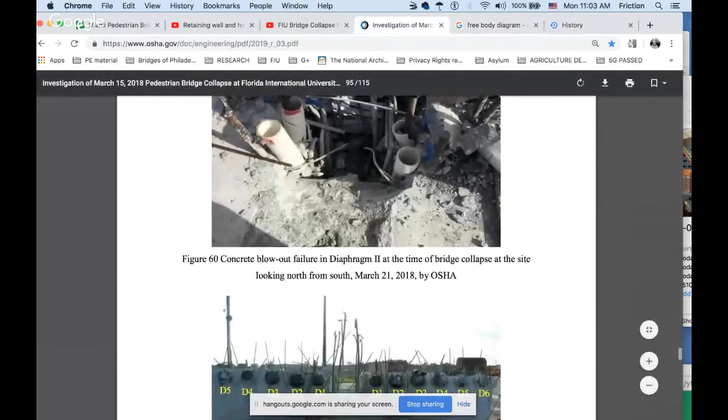If we come to the OSHA report, we find that the software was used by Louis Berger and Adina to analyze the structure in accord with the FDOT requirements that the reviewer use software. So FDOT requires the reviewer to use software other than the one used by the designer. This is reported as a requirement to use different software. So that's not technically an issue, is it? Because you were told to use different software by FDOT.

FDOT had used software, FIGG had used software, Larsa 4D and Lusas, whatever. So you have three different softwares being run here to come up with an analysis, right?

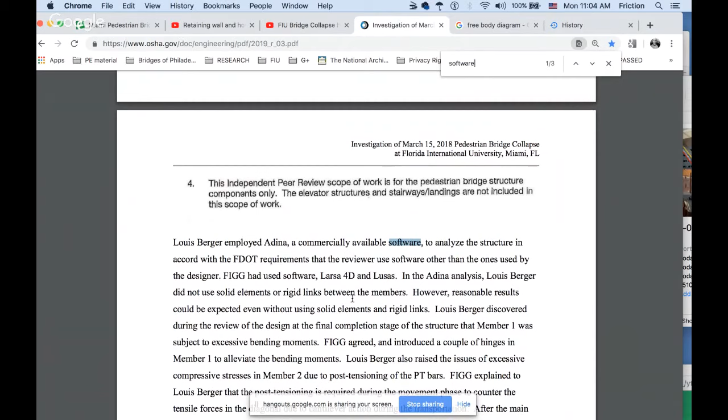And Louis Berger software said, of all things, Louis Berger discovered during the review of the design at the final completion stage of the structure that member one was subject to excessive bending moment, at the final completion stage.

FIGG agreed and introduced a couple of hinges in member one to alleviate the bending moment, showing and implying that member one is not a zero force member. Therefore, member 12 is not a zero force member either, which I've always stated. Member 12 is load bearing, and so is member one. It's load bearing.

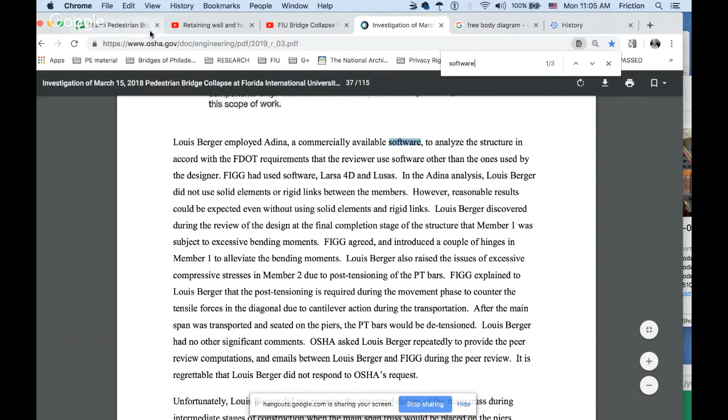Louis Berger also raised the issue of excessive compression stresses in member number 2, due to post-tensioning of the post-tensioning bars, meaning that when they put tension in the member, let's grab it. We're in the report now. Okay, let's do this.

When they post-tension, let's scroll down. When they post-tension the structure, number 2 and number 11 here, that number 2 would have excessive forces in it by the post-tensioning. Then the counter to that is that's because of transportation for the overhang reasons.

FIGG agreed, right. Louis Berger also raised, it's going to come to you in a minute. FIGG explained to Louis Berger that the post-tensioning is required during the movement phase to counter the tensile forces in the diagonal due to cantilever action during transportation.

If FIGG had to explain this to Louis Berger, then Louis Berger obviously didn't evaluate the proper transportation conditions themselves. This shows a disconnect in what they think the structure is capable of versus what the structure is being subjected to, including during movement. If Louis Berger had to be told by FIGG that it's for cantilever requirements, that shows Louis Berger did not have an understanding of the structure. That's what it implies to me, by extrapolation.

After the main span was transported and seated on the piers, the post-tension bars will be detensioned. So this is very important. And Louis Berger had no other significant comments. So Louis Berger did not even understand that these bars were used for cantilever counterforces during transportation.

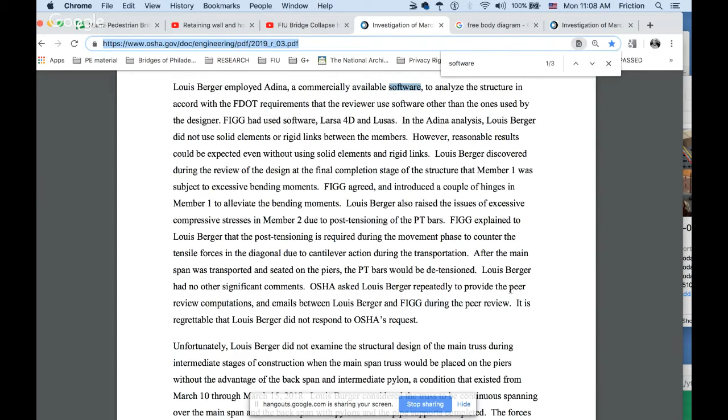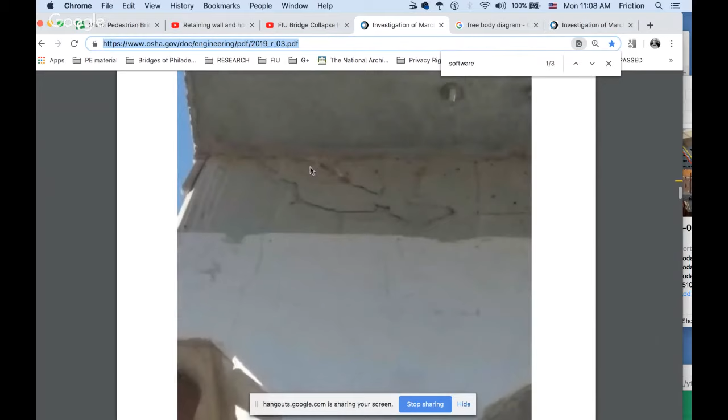All right, so let's go to number 11. This is spalling, apparently, it looks like spalling to me. And this means that the loads are present.

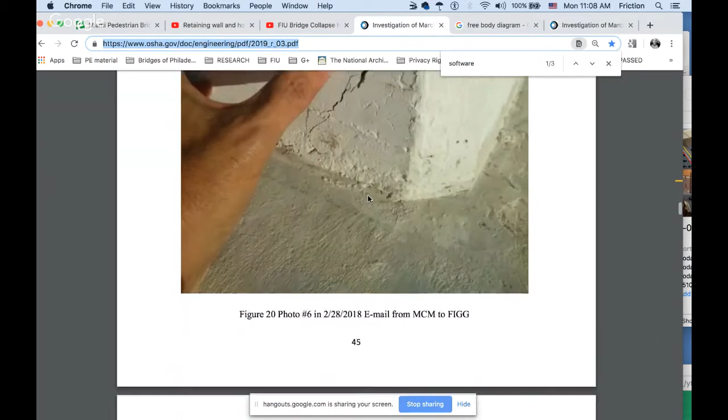This appeared after they removed the formwork, as stated multiple times or multiple ways. Obviously, no formwork is present. I don't know if the base of the structure underneath the deck still has formwork under there, but we clearly see no formwork at the photographic points on each end of the structure, and they show cracks here and there.

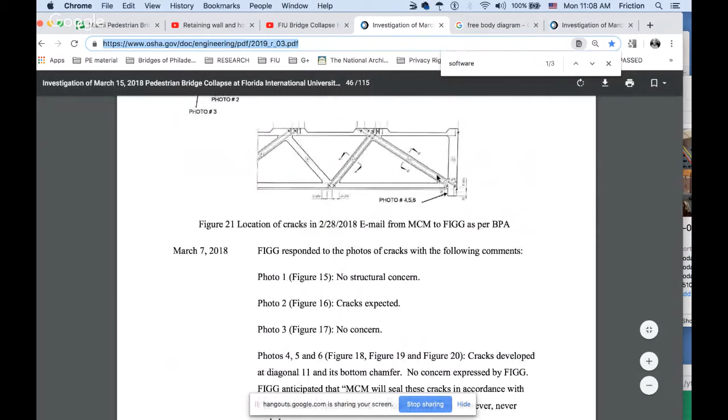This will be nice, guys. You've got to bear with me. You're going to like this. We're going to get to this, number 11. You're really going to like this. You're going to see it so clearly.

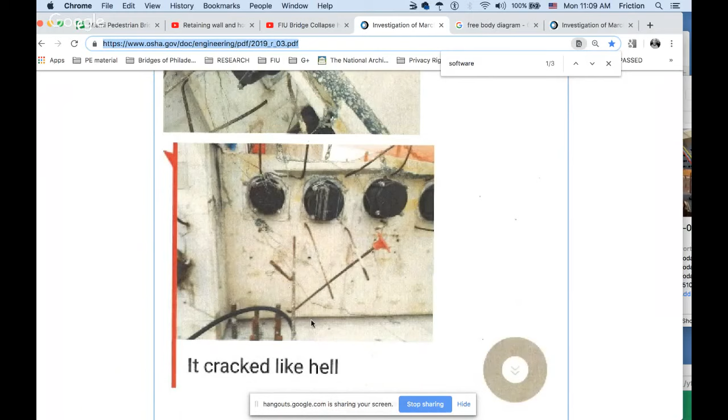So when they removed number 11, the cracks like hell appeared. This is sort of what I've already said, that once they did that, underneath here is a gap. We know about the gap because Denny Pate stated in a meeting that they needed to shim that. You'll see the significance of that in just a moment. Bear with me, and you'll see it no other way.

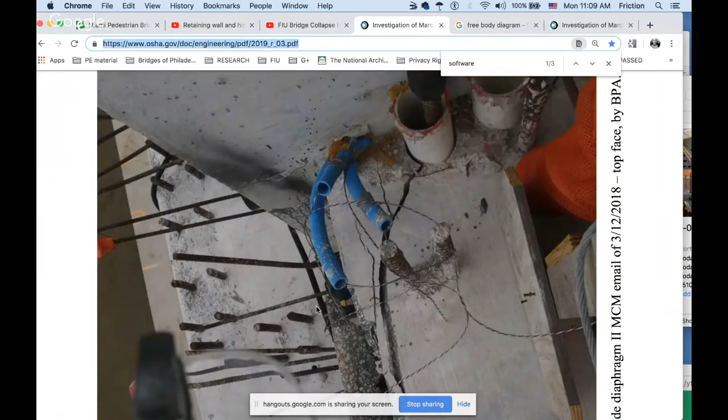This will get rid of all ambiguousness. That's my word, you may have it. It's ambiguity. All right, so ambiguous. I like having fun with words. I told you guys that in many videos.

Obviously, if this is the engineer from BPA, I insult them as being a clown, taking measurements off of a known point would have been these bolts. Trying to guess the center line would have been just not very good. But he put it on an angle, and on an angle you get a different reading.

This is the cracks like hell that we see closed up. You're going to see the cracks like hell in a minute. You're going to understand it so simply. But first, I'm giving you the data first. There's the cracks like hell, and you're like, how did it happen?

Well, magically, I have to go over here, guys. I apologize for offending any of the people in this group. And yes, I will attack this group. So magically, there's a couple of them changing their minds here, but then they get cowered down, they get beat down for saying, how dare you say that? Especially this guy, so sometimes I don't throw the baby out with the bathwater.

But when I do throw the baby out, I throw it out pretty hard. In other words, just because I'm throwing this baby out doesn't mean I'm throwing out everything he states. I've made quite a few mistakes myself in my videos that I've corrected each time. But this bullying thing here, I'm going to give a little bullying back.

It wasn't a criticism, but using factual information to back that up. This is what he states: it wasn't criticism, but using factual information. So we don't know what's really factual in this whole content we're getting from OSHA and everybody else. We assume it's factual data, but we keep getting things like, originally we were all sent on a wild goose chase. Never forget that NTSB and FDOT gave us plans that were not stamped from 2016, presenting it to the public, and then all of a sudden they present 2017 plans with partial 2016 plans still tied to them, current day. So I'd like to see all of the 2017 plans.

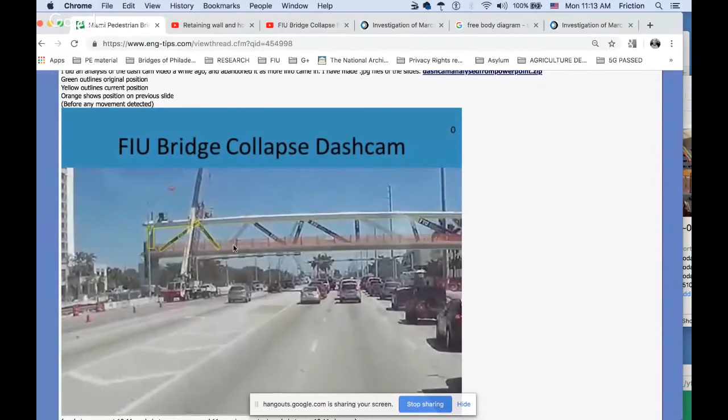I'm not saying this is correct or anything, I'm just saying he goes out of his way, he finds the images, this is the thing there. You're trying to do some extrapolations, and I find it, I'm smiling because I'm pretty proud of it. This is pretty cool, I don't care if the guy attacks me, I'm still proud of it. He's using my string line, my lines if you will. I think he has one here that he puts in place to show it.

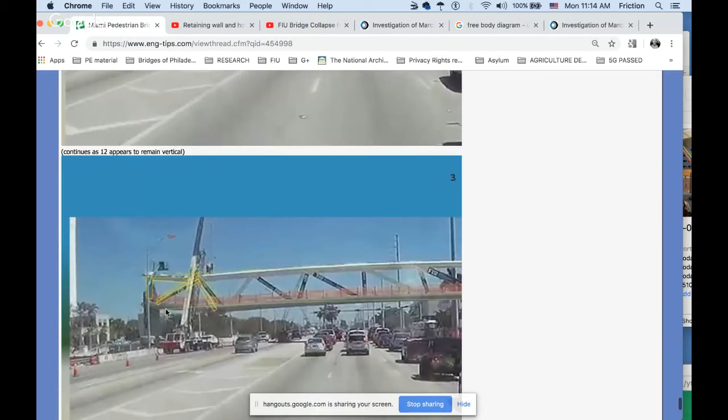And then they beat his ass down in the comments, so much so I think he retracts it to some degree, which I wish he would not have. Stand proud, stand proud of your belief. You should stand proud of your belief. Stage said something to the effect that number 12 looks pretty damn strong, didn't move.

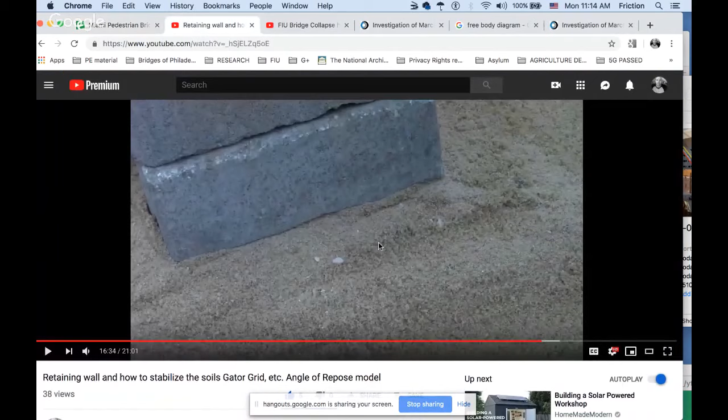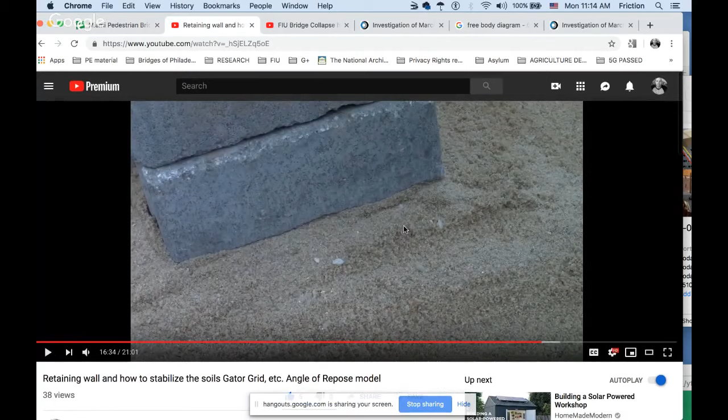Now I'm gonna prove this to you guys, so bear with me. He's got a $1,000 bet, but remember my other channel, how things work here, that I put this video up with the stones. Now I'm going to show you something that's going to be pretty awesome here using this, and you're going to understand what's taking place here.

Who's watching? Hey Embry, like swimwear baby. What's up baby, Embry's like here like swimwear. I haven't heard that one, but I kind of like it. I'm here like swimwear, it's a little rhyme.

So watch how beautifully I tie this in with this. Remember that Denny Pate's meeting was that he wanted, why wasn't this shimmed? Why wasn't this shimmed? You good.

I'm going to have a little fun, I got to be careful. YouTube doesn't like any, they're the new moral police of everything, so I got to watch cursing and everything.

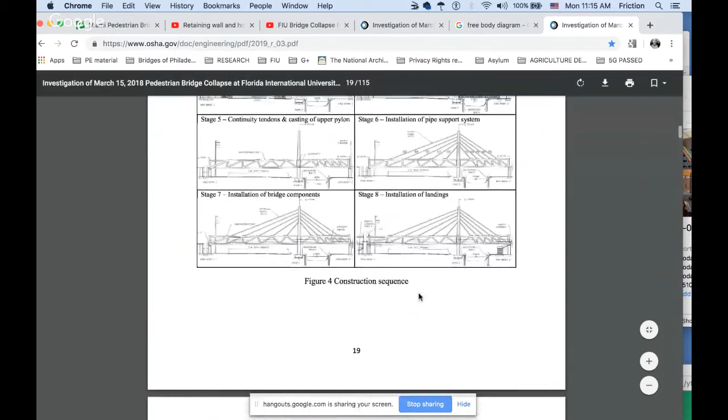So this is an OSHA report, let me get you this real quick. Scrolling. Rawhide, that's what the rhythm of that is.

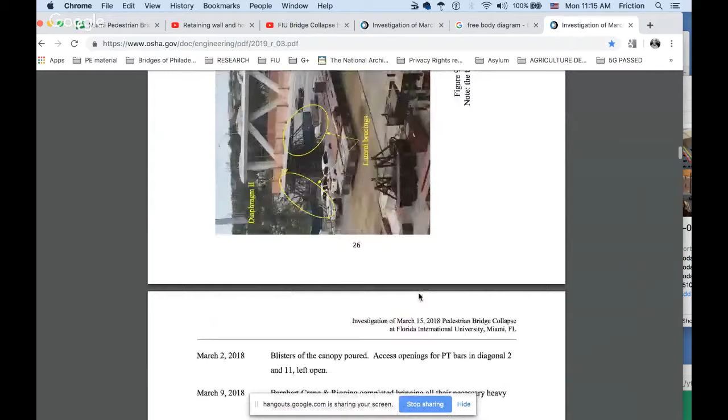All right, so then I'm going to show you my little quick video, and you're going to see that, oh shit, I get it totally. So first I've used the OSHA report just now to prove that OSHA...

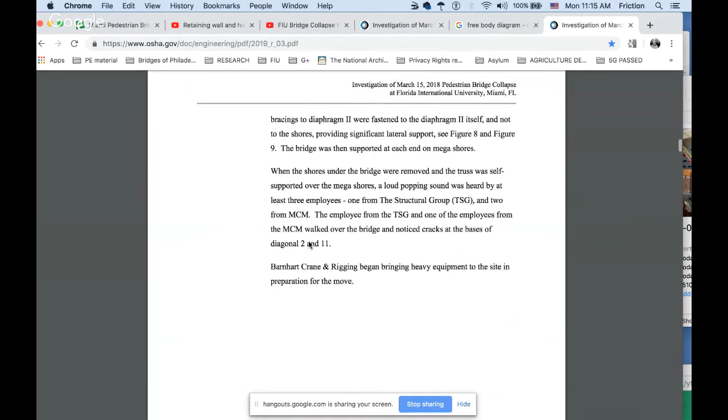states that Louis Berger and Denny Pate came to agreement that number one is load bearing, that it has a bending moment in it, that it is load bearing, number one, which is down here at a site. Great, number one is load bearing down. Yeah, this number one, load bearing, and Denny Pate resolved it with hinges. We established that Louis Berger didn't know why the post tension was added in here, but stated it's going to create an excessive compressive moment inside number two.

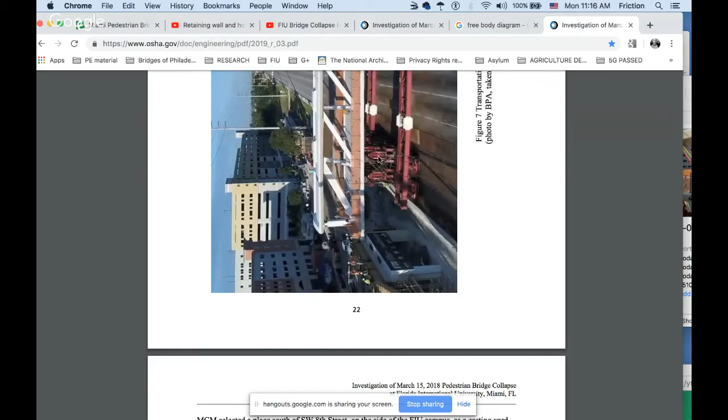Denny Pate had to tell him, oh, that's for the cantilever when we're transporting. At that point, that tells you that we can extrapolate that Louis Berger doesn't even know, couldn't even extrapolate why you would do that. So that shows Louis Berger's competence level, their lack of competence.

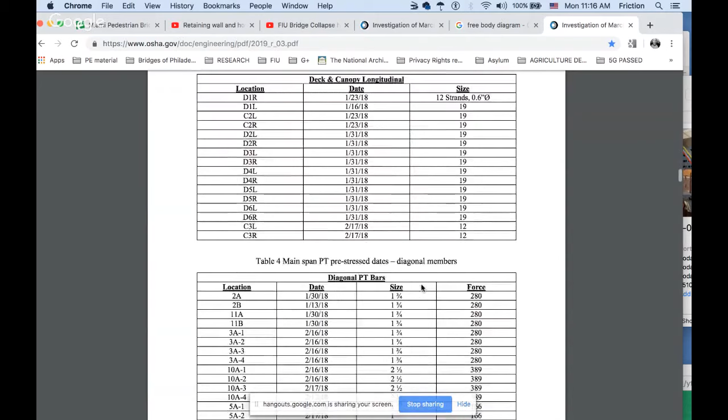So I'm in attack mode today, I'm sorry guys, I'm in attack mode. Louis Berger's, I gotta, you know what, I just made a conclusive vow that I'm in attack mode. So it looks like I'm gonna stay in it for a minute. Wish I could come out of it, but that's the way I feel right now. So you're gonna get a little hit of that. All right, let's go on.

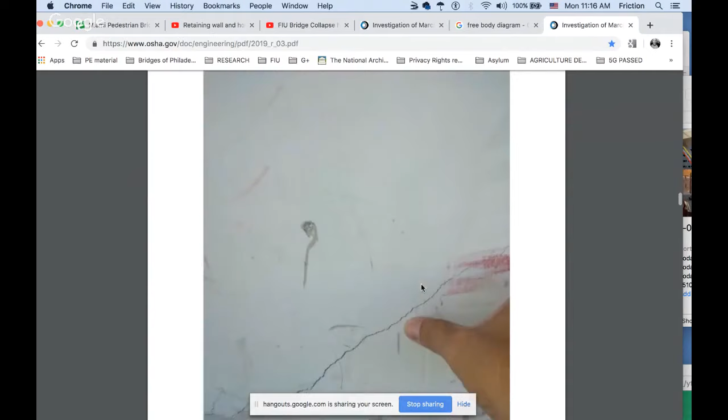Let me show you, I'm looking for, forget those cracks, we already know about those cracks, I went over those cracks so much. Like I said, I'm a crackhead now. This cracks like hell. This happened after the detention of number 11, just remember, after the detention of number 11.

You're going to love this guys. So the detention of number 11, this is number 11, I took liberty here. I changed the colorations, I didn't do anything else here. I added some bars here.

I'll move this out of the way. All it is for plain reasons is to show what's going on.

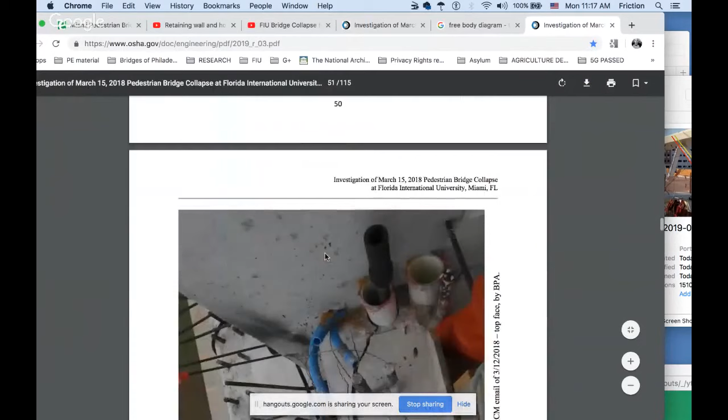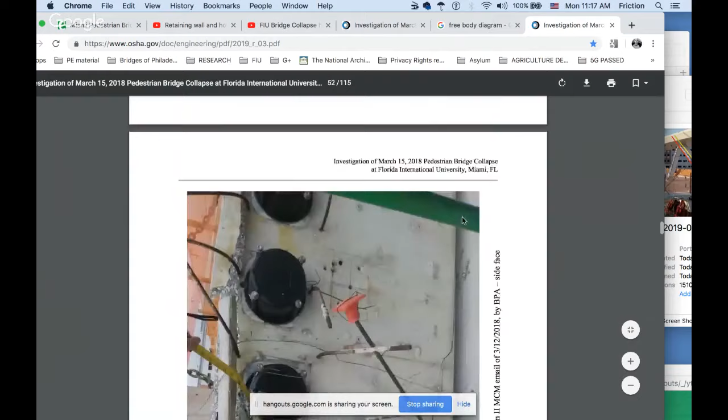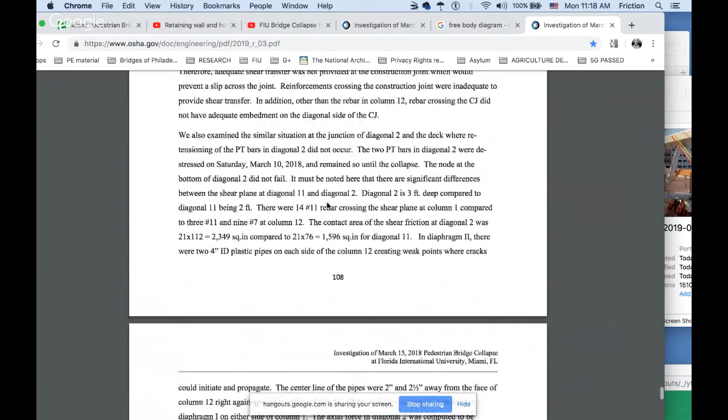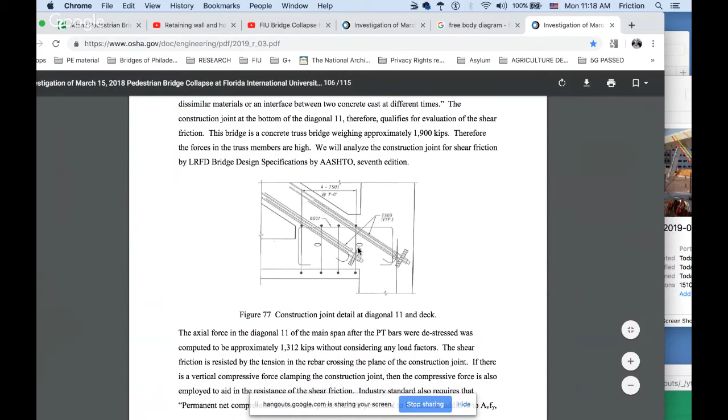Those forces, all this is wrong. Just wrong. The OSHA report is wrong on that. That's where I stand on that. They've got a lot of things right, but they missed that one. Here's A. Look at that, it's behind the clamp force. The clamping force is behind and in the deck. It's in the deck diaphragm area. Well, that's not even a diaphragm, right? It's in the deck. Then we have more data to prove it's in the deck only.

You're going to get a clear visual of this, and then I'm going to show you the release. I'm using their own data, and I'm going to extrapolate that they have loads on number 11, so extrapolating the loads on number 12 by default. There's no choice - this is cantilever. I did a video on that. We know it's loads on there.

You know why? Because there wouldn't be any reason to put any post-tensioning in number 11, right? We know there's load on there because any of you guys, if you have any brains, know that you don't get to stick a cantilever out 33 feet with 2 post-tension bars and that much weight for free, along with the lower part of this deck, along with the weight of the rod.

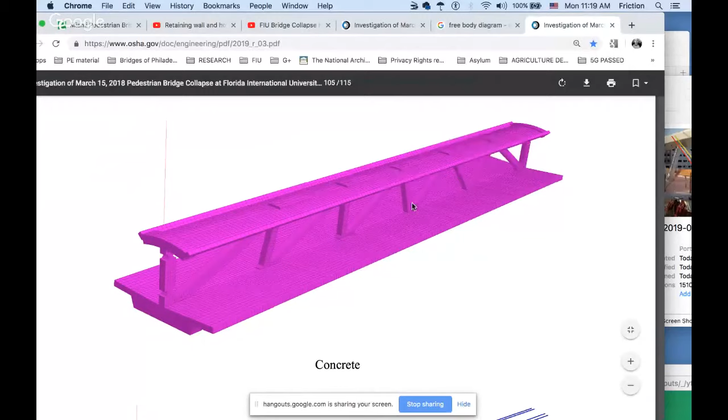Crackheads who keep saying it's zero - one more engineer writes me and tells me that's a zero force member, I'll punch you in your eyeball. I have to say it nice because Google doesn't like that. Let me apologize to Google - of course I can't punch them in the eyeball. They usually add it somewhere else. I don't mean it as a threat. Really, Google, come on.

So here's what we say: men, Google, men do that, say that to men. We know we don't really mean it. You women in Google think that everything's a damn threat. All right, so some of you women, men in Google - how's that? I told you I'm in attack mode.

All right, so look, here's the end of this guy, barely clipping inside 12. So if we use the cross section and also you use that VSL, so there'll be no deviation of the members.

We consider this an as-built because it's presented to us as an OSHA report. At the point this is presented in the OSHA report, I'm calling this an as-built, guys. Remember, we don't have as-builts, but I'm extrapolating - they're presenting evidence in an OSHA report, so we can extrapolate that this is evidence now, this is an as-built. That's my extrapolation. Of course OSHA can say, oh no, it was just whatever - well, then that would detract from their own report. I'm saying we're looking at an as-built.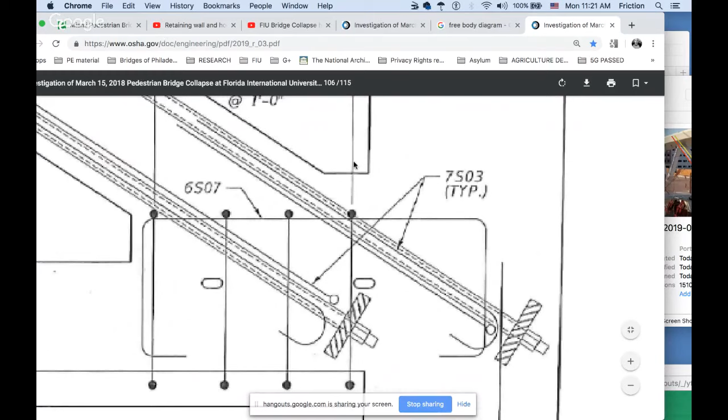Let's use this line here as our measurement point, and I use my mouse down here. About 3.5 mices.

I'm going about 3 mices. Yeah, I like making up words. I told you that. Mises.

All right, so number 1 here, baby. Look at this, number 12. It's outside the diaphragm. During the build, outside the diaphragm, outside the deck. And when this was built...

I'm trying to get the image in the background. Bear with me, baby. When this was built, out here is just this, what I'm calling a blister.

We know that this was built secondarily. First the deck, including this little blister, which means it had the post-tension bar placed in it. Along with, so that's A. Let's put back B, so this will be B.

Terminating above the pipe. Let's now get you a plane line, and let's bring this over. That's the outside of 12. Here's the outside of 12. We're just going to use this plane line in the image.

So now we have a plane line. What's left is this dissects the deck.

My computer guy would like this over there, and he's not my guy. I don't know him at all. Don't even talk to him.

What's left is, let's go with the deck. Oops, I got to go the wrong direction.

Something like, yeah, I got to do what I got to do here. Let's see. So I'm taking a little bit of liberty there, trying to make these bottoms match up. And what's left is this, in the deck area, is this little teeny, well, if I can move that over where it really belongs.

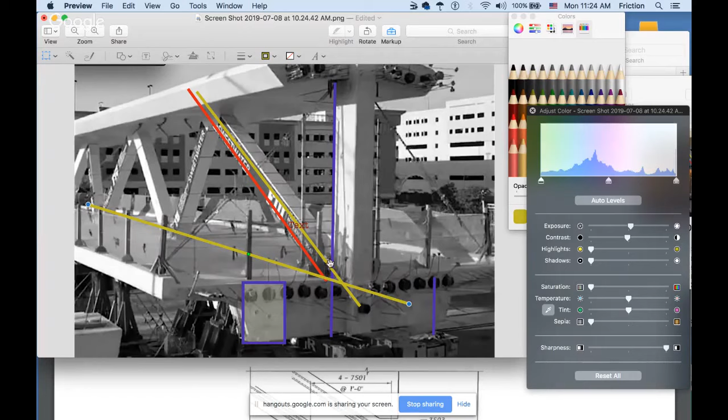The rest of 12 sits on top of the deck and sits on top of this blister. This wasn't all made in one deal. So this is just a column sitting on top of the deck, sitting on top of this blister, sitting on top of this, which gets a little bit of clip in it, a moment if you will, a reaction, because it does have some little bit of concrete in it. So imagine some post-tensioning going across it, just at that little bit of a section.

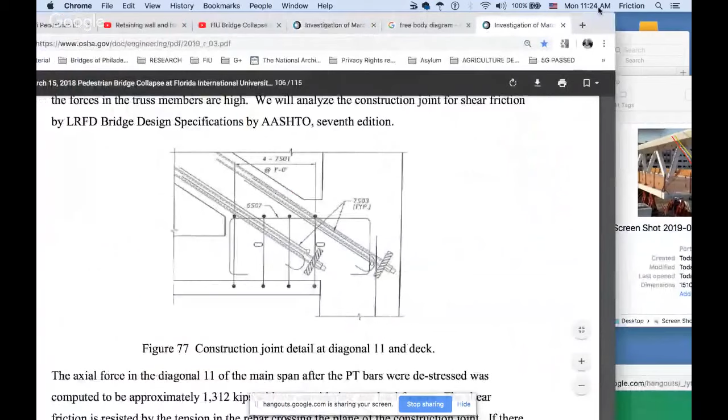Bear with me, you need the data for me to show you the video, and then you're like, oh, okay, I get it. So right here, hell with that.

So right here, so we've got it. That's why I said, my stupid ass, I could have just done this. Since I'm using this as the as-built, I don't even have to take that much liberty. I can use it as an as-built.

So this is 12. This is the deck, rather. This is 12, where you see this right here. So what's crossing right through, here's the deck. So here's 12. Let's do that.

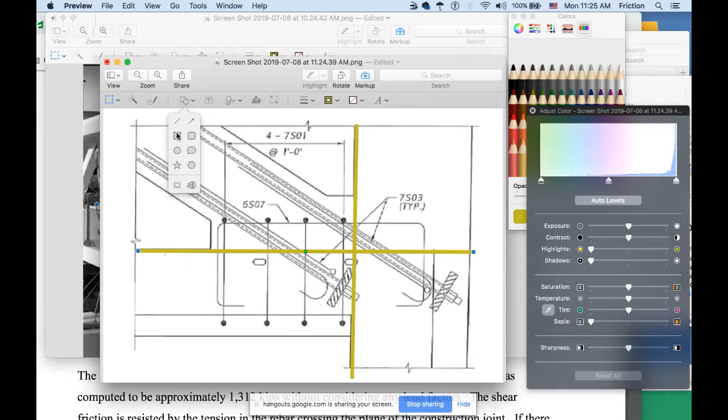Can I get a triangle out of this? Can I get a triangle, baby, for $10? A triangle for $10 appears not. And you can't deform that. Great. Oh, I got a triangle for you. Can I get a straight line?

So there's our, I'm going to go to the outside of it so we can see it uninterrupted. So this is the part sitting on the deck. This is on the deck. This is the triangle, the transverse of this.

But keep in mind, this member here stopped. Yeah, I have to make sure you understand. It stopped here, this number 12. It was all poured together, so it's integral, but you see the paths, the load paths. But this is the only triangle in 12 that goes down, sits on top of the deck.

The rest of this guy looks like this. As you can clearly see, it's got a peculiar shape to this bottom section. It's sitting on top of the deck. Keep that in mind, but the cross section inside that 12 looks like this triangle sitting here.

And the rest of this guy is sitting. And let's change colors. I need you to see this so you can do this. So bear with me, you're going to love it or you're going to hate me.

And if you hate me, well, I hate you too. I got feelings. Just because I'm a tough bastard doesn't mean I don't have feelings. I don't have any feelings. I'm like Embry. Hey, look, I got feelings. But you guys can never touch them. You can trigger me, that's not touching my feelings. That's messing with my conclusive files.

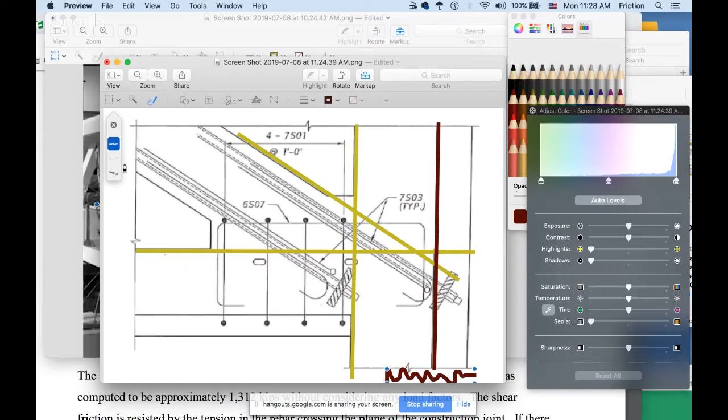Cool, so I have no shims here. The forces are downwards. You say, well, prove that. All right, give me a second, I'll get to it, I got you covered. So you see that little blister, this goes back there, I guess I can tighten it up a little more. So the area is somewhere like that, the load.

And what happens when you release that load is this dead load comes down, as the report shows. And number one, the compressive member. This is not, as any engineer keeps telling me, a zero force member. If you think it's a zero force member, then you remove it. In fact, I got to go over here and do some trolling. I got to tie this in so I can prove to you guys what these guys keep saying about zero force members, which is triggering me to the point of a mental breakdown.

Because I'm not having a mental breakdown. It just seems that way.

Hey, get out of there, Bruce, George, my cats. I'm going to beat his ass. Hold on a second. Hey, that wasn't the intent of that. Come out of there. I covered the couch with a tarp, and my little man climbed underneath of it. Little punk. All right, so, oh, shit.

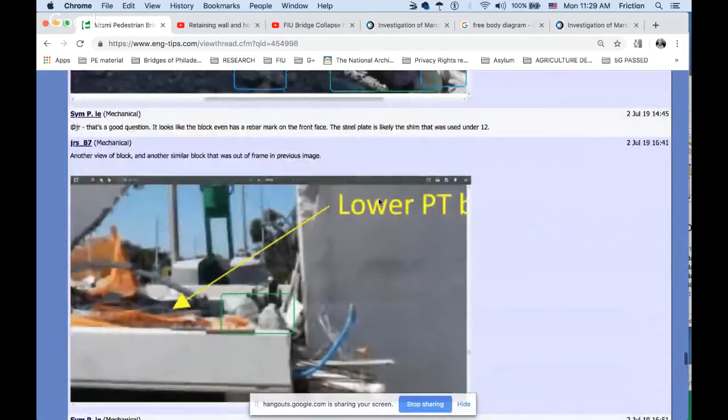All right, hold on, bear with me guys, you'll like this too. I got to be able to prove all my nastiness, right? I just can't be nasty because I'm evil, or I woke up on the wrong side of the bed. No, he's got a truss system up here somewhere that he shows why it's a zero force member, this engineer here, and this is what happened.

Magically, all their formulas just show the bottom of the bridge sliding over like this. Just sliding off, causing all this shearing and all that. I'm like, well, what did it do at the top? You got this part moving on its own. And how come the cracks aren't in there? And where are the rebar and the reinforcement? What's it doing to this member here? Why is it still in place?

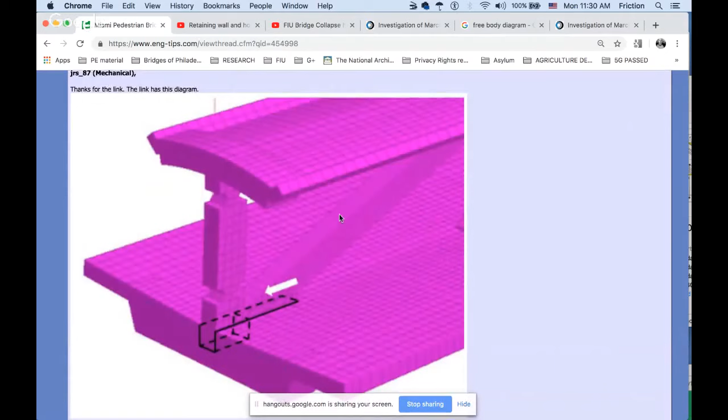Clowns, crackheads, this is a total different end of the structure. This lands totally on the diaphragm with no extending blister. It's 3 foot, whatever, it's 3 foot. All right, grow up, it's a totally different end.

This lands totally on top of the structure, the other one sticks out. Well, who did this? That guy. See that? Don't throw out the baby with the bathwater. I like this, he did a merged picture of one end to the other.

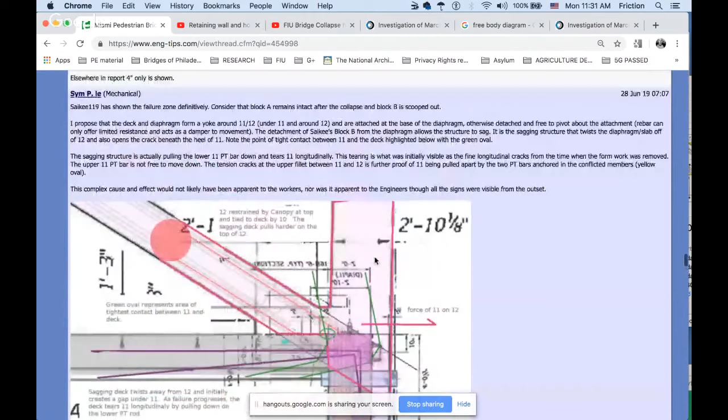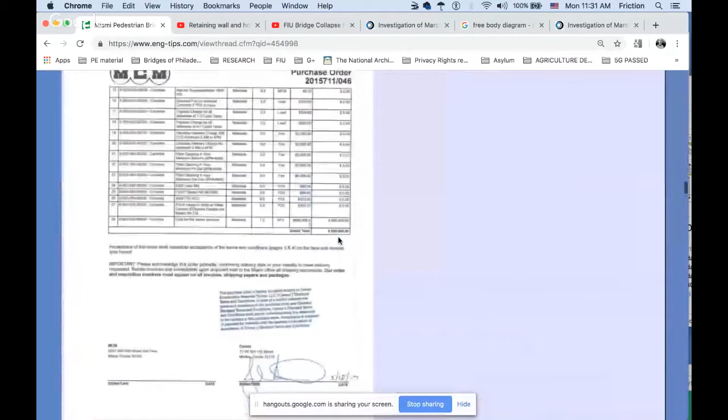I have not quite read all this stuff, I bounce in and out. I kind of like the computer guy's stuff, it reminds me of DOS and my other man.

A couple of you guys there, the computer guys, the structural guys reminded some people to write me on my channel, just trolling, just burning me up. Looks like their comments writing to me, and you guys don't see it, I don't post them. I'm like, whatever man, just go play in your childish brain.

You structural engineers, they just handed you your damn degree, and you must have got the damn engineering certificate when they were just handing them out, the PE. When they were just handing them out. Here you go, you're good. 1930s, all right, frig it, I don't know where it is, let me chase it down.

Give me one more second. Well, they're stating that these are zero force members. They don't count.

And nope, you know what, let me do this, I just want to do one back. All right, I apologize for putting you through this. Is this one back? I can never get this right.

That just creates shear. That would just tear the thing apart. It was his idea of what he thought they were talking about, recapturing the loads from the node, from number 9, 10 to 12. Well, he did that. That would just shear that thing right apart. That's what he thought, I think. And it's okay, it's a computer guy. He doesn't know, and these engineers don't even know either. They couldn't. At least he tried.

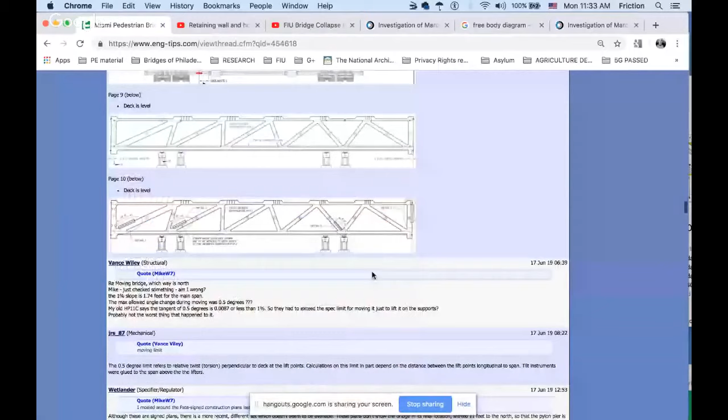But everyone, they're arguing again that this is non-load bearing, that this is a zero force member and zero force. Yet I just showed you in the report that this is load bearing.

And no luck on, you guys got to come over yourself and find it then. What they keep bitching about, zero force. Whoa, there's that one again.

So the engineer states, but an excellent representation of what FIGG had proposed according to page 76 of the OSHA report.

FIGG did not - this looks like a quote from the report - FIGG did not know the reason for the cracks, but still expressed no safety concerns. However, FIGG in its presentation alluded to a lingering concern about the structural inadequacy of 11/12 node, until the intermediate pylon and back truss were completed.

The pylon here and the back truss. FIGG mentioned a temporary mechanism to capture the nodal zone. FIGG opined it may be appropriate to transfer some of the loads off 11/12. FIGG was to consider options to capture some of the forces from the node. FIGG also stated that the prudent action is to share some of the load carried back to 9-10 and construct the pylon down. See, to share the loads coming back down at 9-10, which I've always stated.

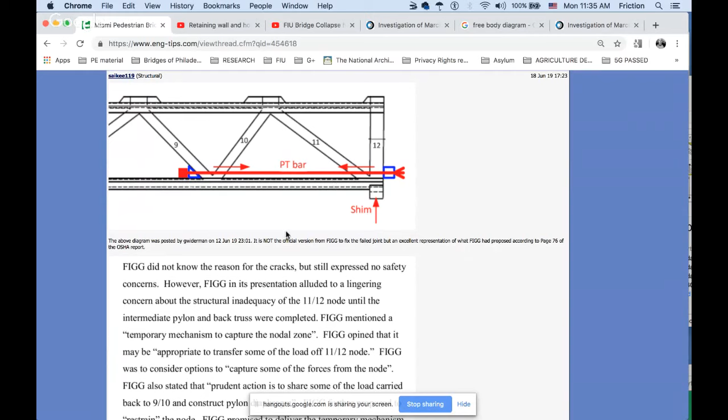So you structural guy, this is another one of you - you suck beyond belief. Beyond belief, I just can't believe. I mean, I believe what I'm reading. You know, you must be a fake structural guy. All you guys in here must be fake structural guys.

I apologize for that, because a couple of structural guys are no longer commenting anymore. They're leaving this out, they're bailing on it, because I think they find these guys to be - well, either they gave up, or they think it's redundant, they believe them, or they don't want to go against this group that attacks anybody that thinks they're a crackhead.

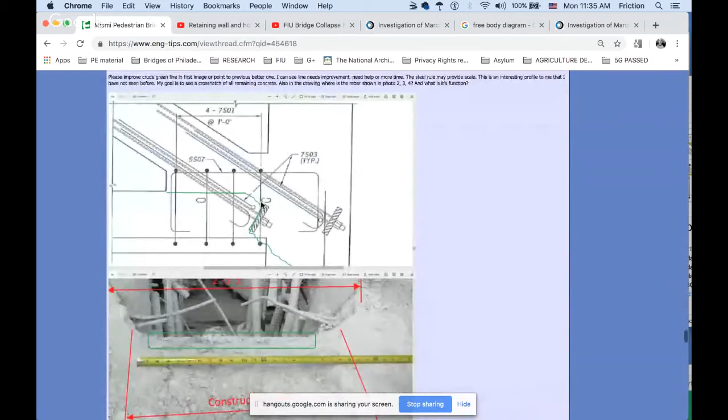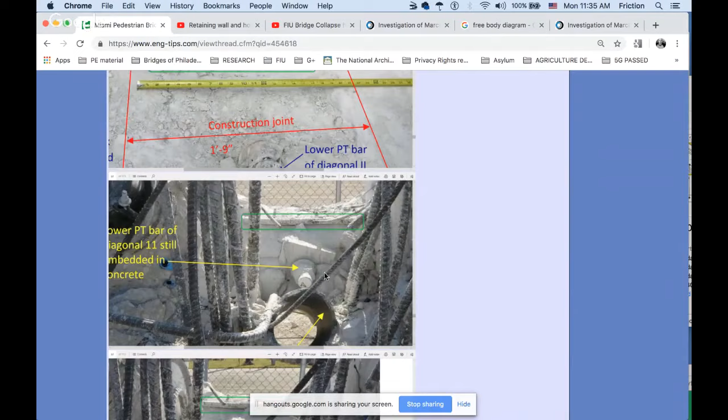Here we go. This image here shows that this is the base. This is the number A. It's still in place, I'm going to show that there. And there's A again, and I don't know what the rest of the drawing is. This is probably pretty close to that.

This is Tom, let's see, okay, there's notes. So JRS 87, I like what he did here. Is this his thing there? Yeah, that would be the counter.

You just need - he removed part. He removed the base, he used some software and removed part of the rest of the diagram. This part. Too much liberty there.

I'm out of here, I'm out of this one. I was just trying to find out one thing to prove to you guys the zero force member crap, and that's not going to happen in this lifetime, it looks like.

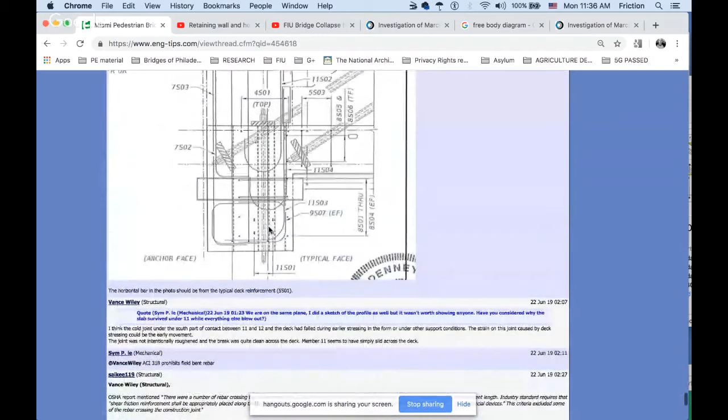All right, let me jump onto the retaining wall to give you a little excitement now. Well, before I do that, let's see if I got any comments.

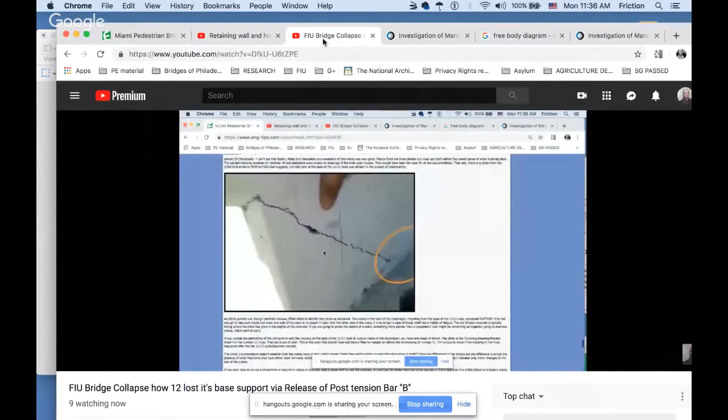We all love you, thanks, North. I have your cat's name, George, yeah. Then number 2 would be racking.

Number 2, racking. Yeah, I would say the same. I said racking in a video a long time ago, if you remember, and I thought it was going to stay there. Was it for racking reasons, overhang reasons? I did a couple of videos on each one, but number 2 would be racking.

If you leave one in place, you think the other one would pull, right? Theoretically, it's a force being created, and I'm going to prove that in my video in just a minute. Let's go back to this.

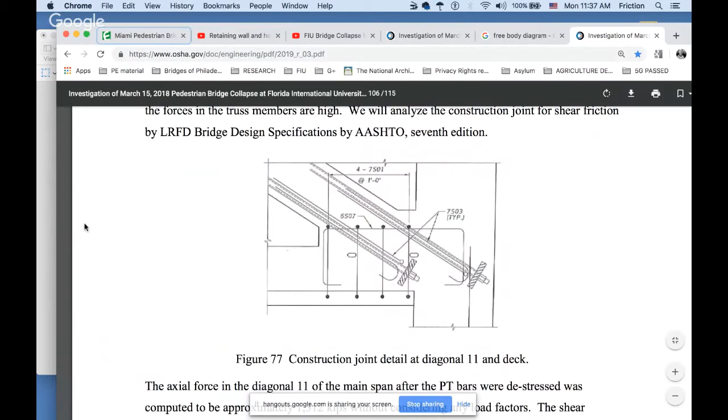So the OSHA report, I got to give the rest of the background. So we saw how I just showed this, how this is sitting on top of the deck and 10 inches of it is sitting outside the deck, on top of just a single blister that gets load released.

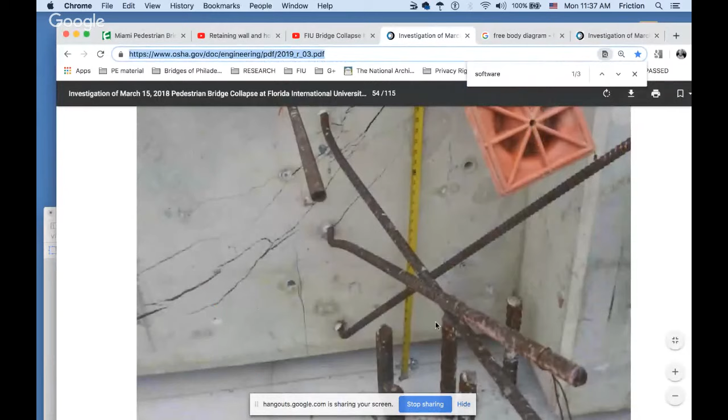So you know what? Yeah, maybe I'll do the video now, and that way you can see it. So what I'm going to show, because this is missing, is that once you release the loads, I'll calm down and just change my pattern of speech. When you release the loads here, it releases the clamp force here, but only B, because A is inside the deck.

It's not part of our failure. So it's only B. As we can see, A is still there. B is the critical one. B is our critical one. Once B was released, it cracked like hell, they stated.

Cracks came here. This was a downward force, let's give us an arrow, and I'm going to take an arrow this way. I guess I could do a shear thing and all that, but only engineers would understand that one. So, ooh, I just came up with something, a downward torque, because we have different measurements here. So that did take a rotation.

And what stopped this from falling all the way down, as I state, was that they only loosened this. Upon loosening it, the loads of this, the concrete resisted as long as it could, and then it cracked like hell. And I don't know if it was 15 minutes or instantly.

What stopped the rest of the crack like hell to complete failure and probably killing everybody right then was that this bar was still in place. The plate grabbed and the nut grabbed up top. That stopped it from continuous cracking like hell.

Over the next few days, creep took place, developing into what we see the day of the photographs on the 14th and even the 15th. We see it developed, not much, believe it or not, compared to what it dropped, at least in the photographs we were presented. Keeping that as my disclaimer, what we were presented.

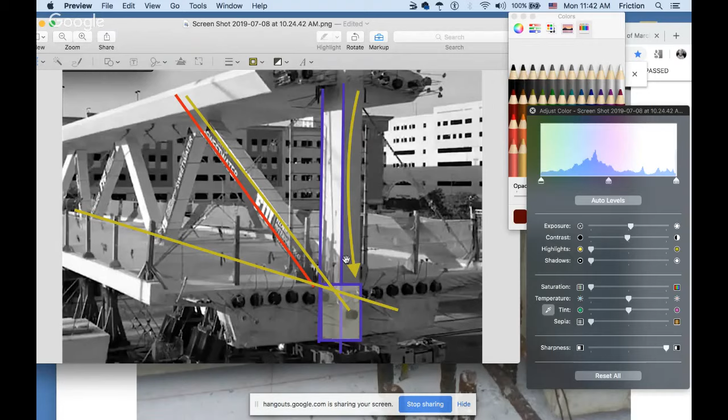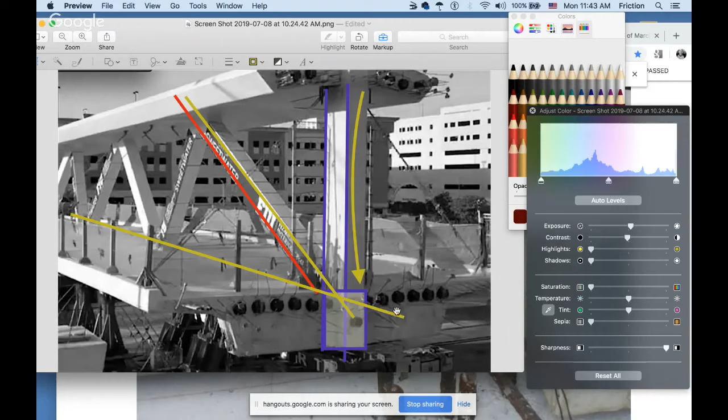Now, if you guys say it's a zero force member, all right, you crackheads, it's a zero force member. How much weight does this zero force member have? Tell me that. It's got some weight, doesn't it? How much of a load does it really have? Now how much can this girder withstand, since it's only - and how much can this girder now withstand? Keep in mind that it was also taking forces now. Now you're going to put these back. Of all the weight of the deck, it's on top of shims only, transferring all the loads on the shims, not on a full base. So it now has - and it wasn't designed to transfer the loads on a shim. This was designed to transfer the loads on a full base.

Okay, so now I go to my beautiful free body diagram again. Now I'm trying to show free body diagrams in real life. We're using sand and all this stuff. Let's go ahead and look at a free body diagram - my retaining wall that I put over here. Embree didn't comment, I don't know if he did or not.

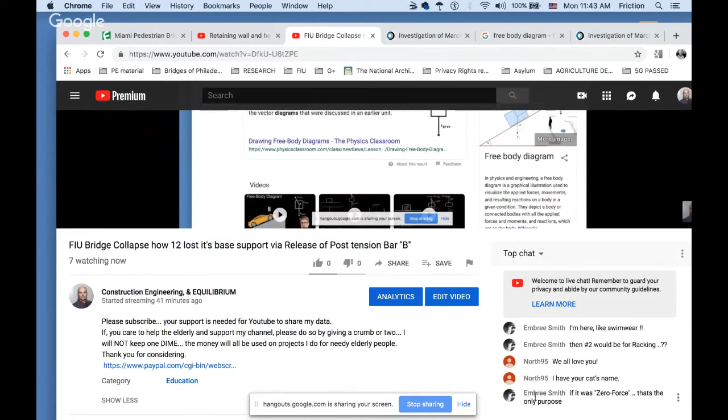Punch Embree in his throat. It's not a damn zero force member. It was zero force, I know. I know what you mean, Embree. I'm just taking it as a troll, and then I said that - I know what you meant.

Zero force, yeah. So here we go, watch this, watch what I do here. And watch how I explain number 12. Trying to ultimately get to the same failure - let's see how soon it would get there.

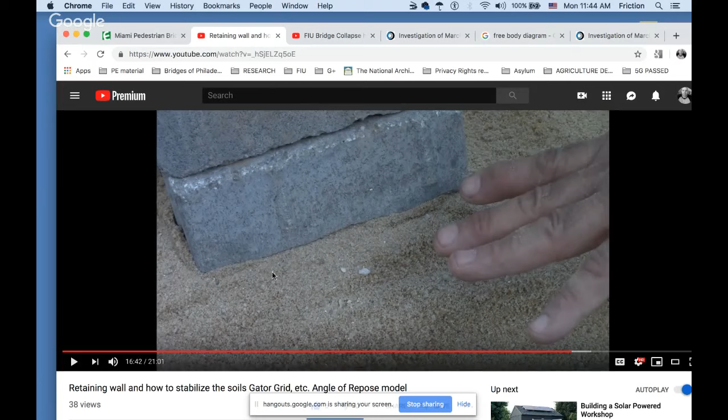So what I did was I loaded some pavers on top. I've got sand here, and I have a fabric between here to stabilize the soils. So it's compressing, and I also have the balance of the wall down here now helping. The soil around it is pushing back. So to be fair, I got to cut that away. Here we go, so let me make sure you can see what I did - I don't want you to think I did any magic act. All right, so for fairness, I just cut it away similar to where it was without the balance.

Come on, cat. So I loaded - so this just has fabric here. This fabric right there, it's only 3 layers of it, stabilizing the soil that it can stabilize in that area. It transfers the load in a solid capacity and a more solid capacity.

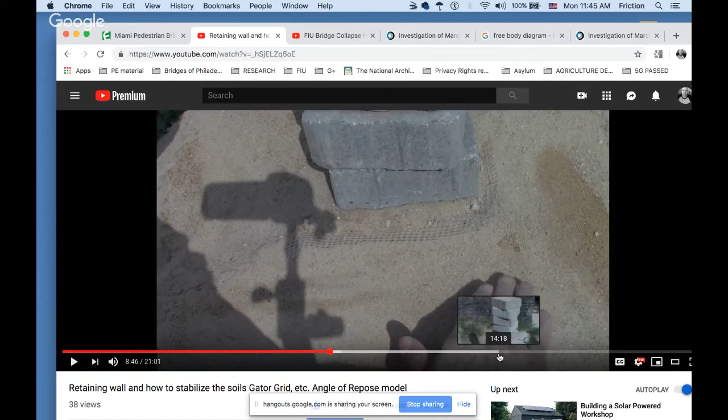Oh, I got to be out here 16 minutes, I think. 16 minutes, here we go.

The wall down here now helping. The soil around it is pushing back, so in fairness I got to cut that away. All right, so we look here.

Wait for it, though. Wait for it. I'll give you a little better shot of it.

Wrong video. Where'd you go? Here, so let me make sure you can see what I did. I don't want you to think I did any magic act. So for fairness, I just cut it away similar to where it was without the balance.

Come on, cat. Don't come here now. It'll be over within about 4 minutes. You see the soils are compressing and doing its thing. So the soil's in compression now.

This is load bearing. A free body diagram, a computer program, would show you right now that as I load this wall, it's becoming, let's say, it has an ultimate failure and say it's 100 - just use a round number, 100. Well, as I load this, I'm getting closer and closer to 100, and when I get to 100 it's going to fail. But internally it's building up, and you cannot visualize it.

This is what the programs do. This is the free body diagram, what engineering does. So right now you can visualize it - I'm at whatever, 80%. And then when I get to 100, you'll see failure, where it no longer can take any more. Well, 100, past 100. How's that?

I chipped one of them in that damn experiment. That was it. All right, it's already falling over to the right. So I'm stating it's falling over to the right, meaning here already, and I'm compensating with holding it, but I'm adding a stone anyway. I'm balancing it now. Here it goes.

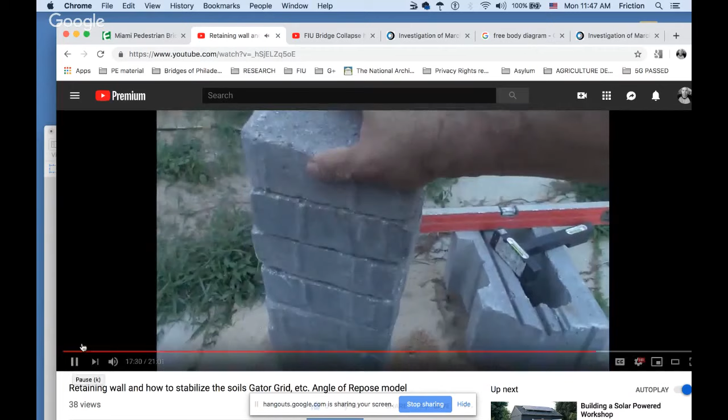It's gone, so I'm going to hold it in the air. Now let's count them up. 1, 2, oh baby, it's still holding. I'm using a lot of counter force on it. 3, 4, 5, 6, 7, 8, 9, 10, 12, 13, 14, 15. And it's failed at 14, because 15 couldn't make it.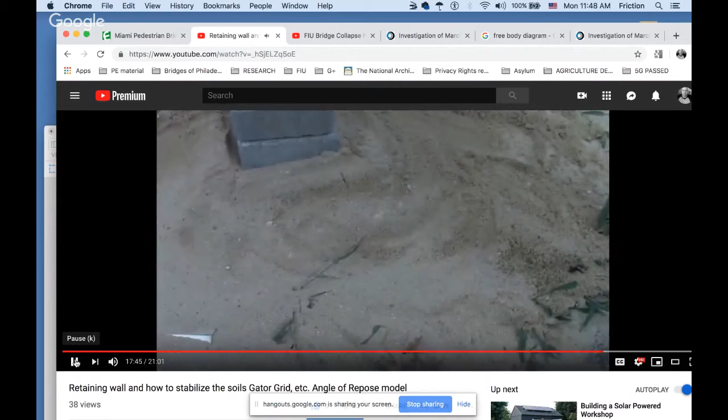You see what's going on there in the soil? I'm just helping it. I'm going to put it back a little bit and try to break it down. Now let's have a little fun and see if we can give the soil some counter forces around it.

So watch what happens here. What happens if we give the soil some counter forces? Aha, these are your counter forces that I'm referring to right now. That's the falling over - you'll see it in a minute, or you'll put it together on your own. The counter force from this falling down right now, causing the shear, is B.

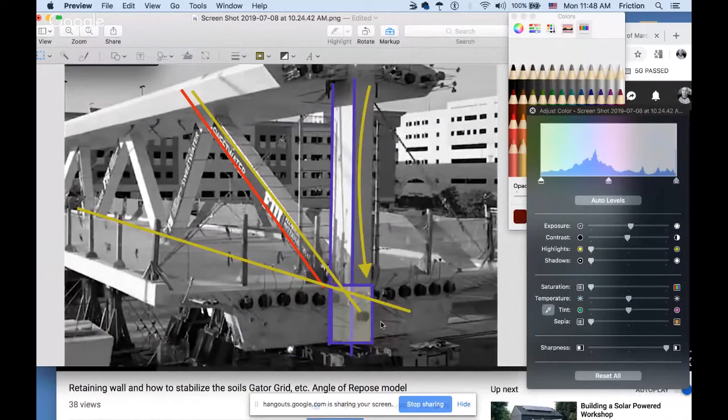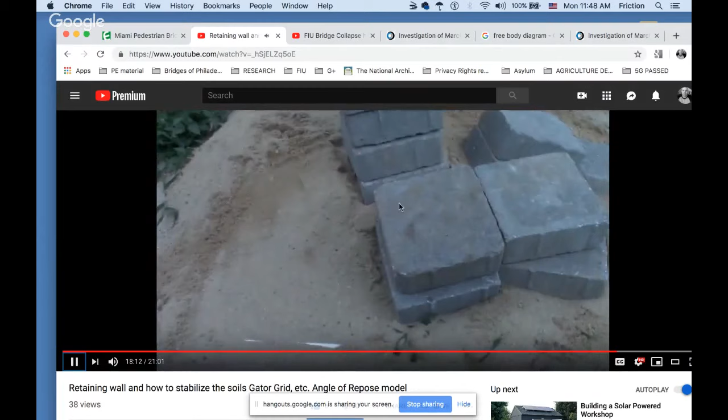And when I release B, we get the failure, and you'll see it in my video here. We notice it compacted somewhat, right, because I just ran that down into it. So in fairness, I should have broken up the soil, made it soft and fluffy again, but I'm saying look, you guys are just going to have to extrapolate that I'm going forward with a little bit tighter soil than I started with, than a baseline.

I'm adding pavers on top of the column right here. We're at 4... 8, 9, 10, 11, 12. Let me grab some more. I competitively can't count those damn things. Over 13, counting over 14 is just too much math for me.

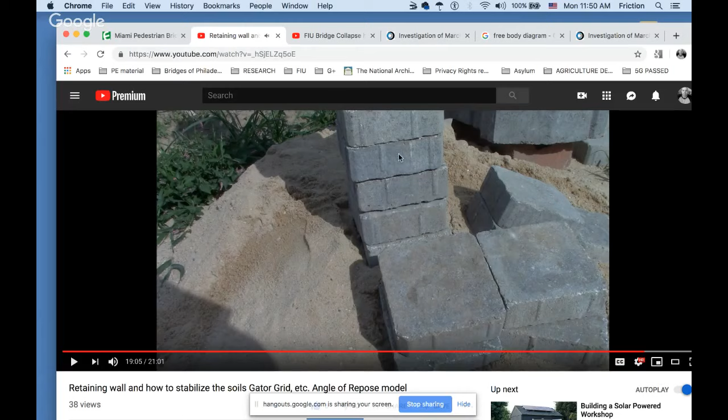I'm going to add some more dead load counterforces on the base. 15, 16. See, we're coming about it differently. We're countering it, it's pushing out forces. I'm at 16, unless my counter's off. I had failure at 14 before, right? And I have these guys here, watch what I do. A counterweight, if you will.

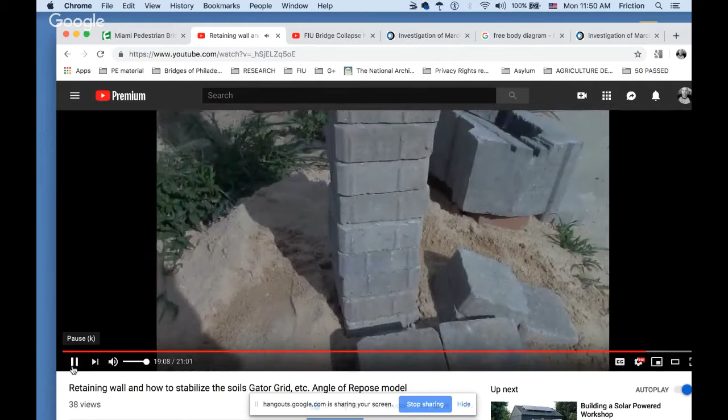So we're at 2, 4, 6, 8, 10. So the zone, this is number 12. It has a zone that is pushing against, all right? Whether you like it or not. Even your fat ass when you're walking, you have a zone you push against the floor. So right here, this is a zone that's pushing against.

There's still some load out here carried out to the end, but it's only now acting as a scab, holding on like a baby wrapping its hands around a mama, a daddy, trying to hold on, helping hold the loads in. And to help that baby hold on, somebody put a little rod through the baby's back and clamped it there. Wow, that's terrible. Anyway, yeah, that got a little far.

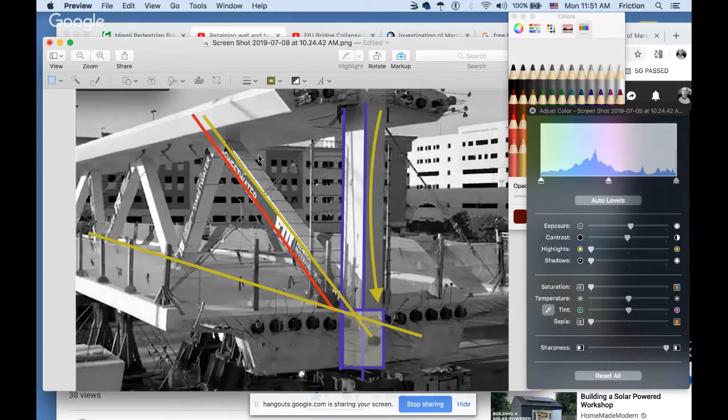So anyway, that's holding, this force is counterforcing it. Wait for it, wait for it. And 12, 14, 16.

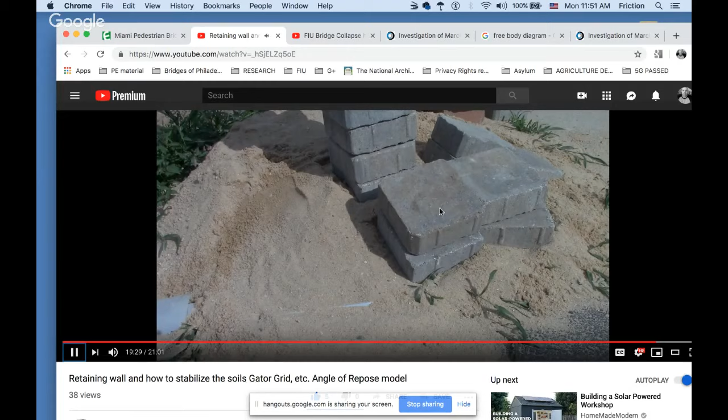I think it's close to trashing my camera. I'm worried about it falling on my camera because it's unpredictable right now, but it will be predictable in a minute. I'm going to remove these and prove to you the forces will come that direction. I'm going to first counterweight a little bit.

It doesn't have to be 17, right. 18. Ooh, hold on, I'm at 18 now. Same damn soil. Look, the counter's off. 17. But I didn't touch it. I made sure to put it in the sand only over there.

Add those, 19. We're at 19. Look. Watch my 1, 2, 3, 4, 5, 6, 7, 8, 9, 10, 11, 12, 13, 14, 15, 16, 2, 4, 6, 8, 10, 12, 14, 16, 19. Now, 19.

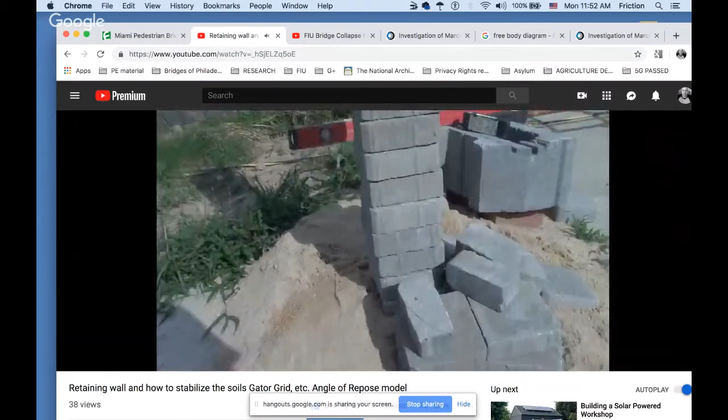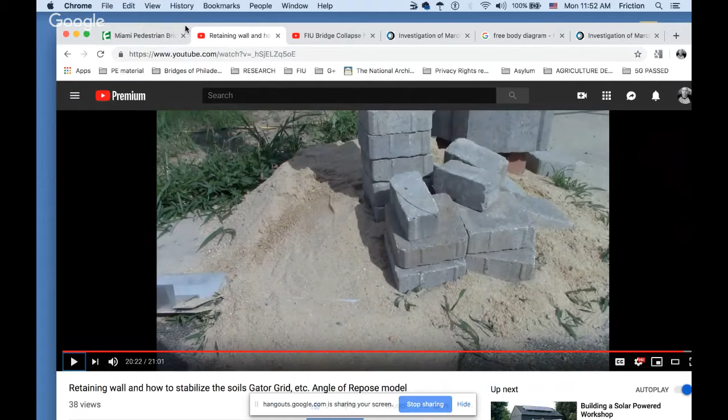Check this out. So now we're going to remove the post-tension rod, number 11B. We're going to pull 11B out of this. My column is stable right now. So what I'm going to do now is release 11B, the base. This is holding the base together down here, fellas.

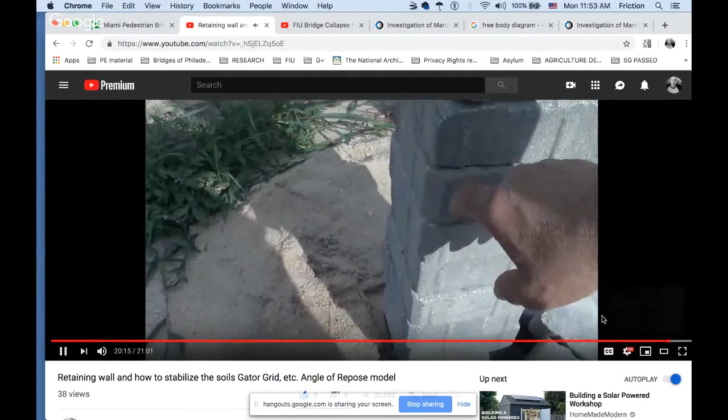Whoa, there you go, simple as that. 8, 10, 12, 14, 16, 19. Now, 19.

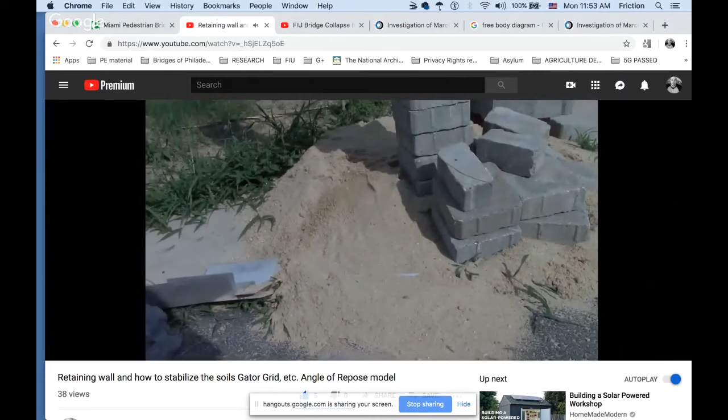Let's remove some counterforces that prove my counterforce theory, right? One, don't hit me. Whoa, there we go, you put it back. See what happened? So there's your fail. Now it can't pull away because at the top it's tied to the canopy. So where do the loads redirect to? They go right down where they can, they redirect to the diaphragm, and they cause the cracking in the diaphragm.

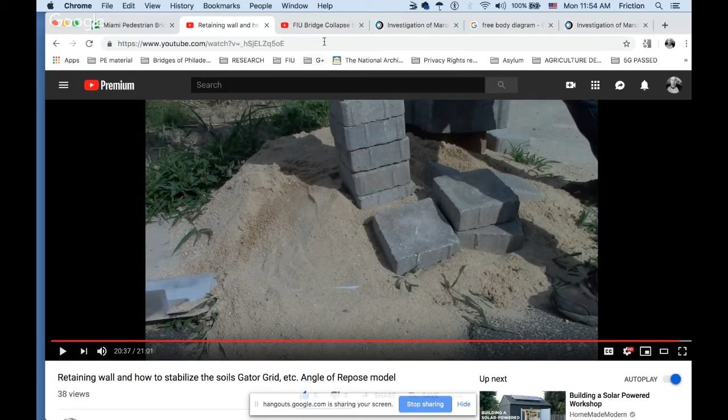Now, what would have saved it? The shims Denney Pate spoke of. It would have kept the loads transferred back down into the pier. So you tell me who you're going to blame, guys. Are you going to blame MCM for not doing the shimming, or are you going to blame Denney Pate for his engineering skills on this one?

You tell me how you'd like to point that finger. Obviously you can also point it towards Berger, who seems kind of incompetent in not knowing what the intent of the post-tensioning in number 2 would be. So you tell me what you think. MCM should have grouted, they're the builder. They should have understood the structure totally, along with BPA, which is the CEI, along with FDOT, along with everybody at the job site.

Now everybody wants to attack Denney Pate. He got in his car and went home, back to the office. All right, he went home. He did that.